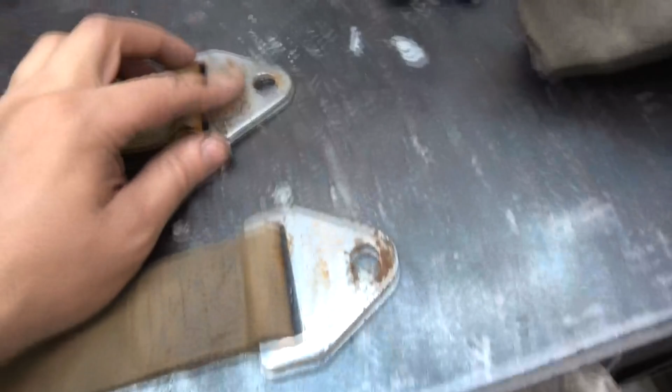So I think what I'm gonna do is just wash them and toss them in there. I might wire wheel some of this rust off, try to leave the paint on there if I can, but I did get a set of seatbelt bolts for the car. They do fit in there.

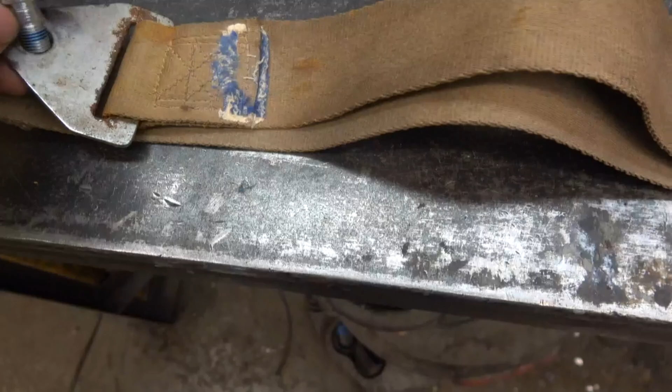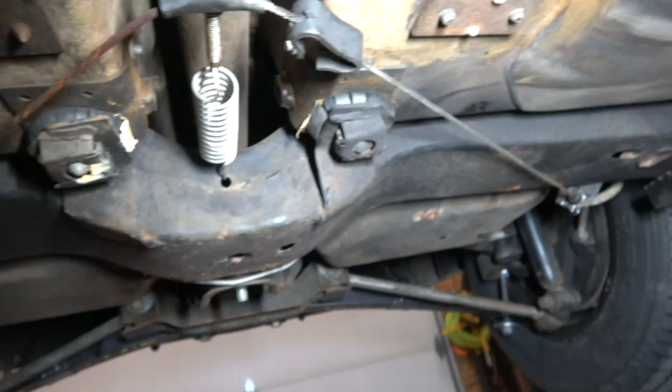I'm not sure what year they started it, maybe in '65, where they had cables going to the seatbelts underneath the car. We'll take a look at that area. So here's the bracket on the car that bolt screws into, and they would have had a cable coming down like this.

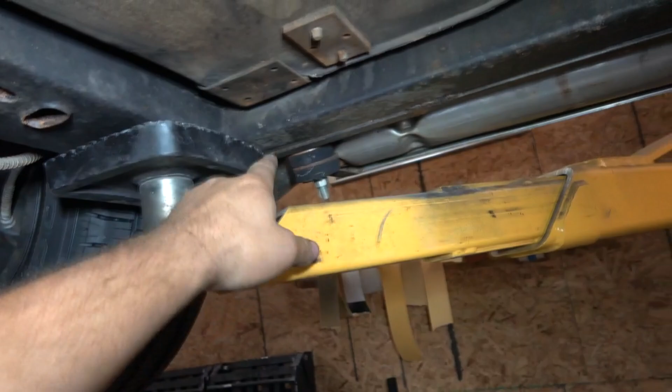There would have been like a thing in here for the cable. The lift's on it here, but this is the other bracket, I believe. And then the cable would come down and screw to the frame. So I don't think this car had those, so I'm just gonna put them on without it for now.

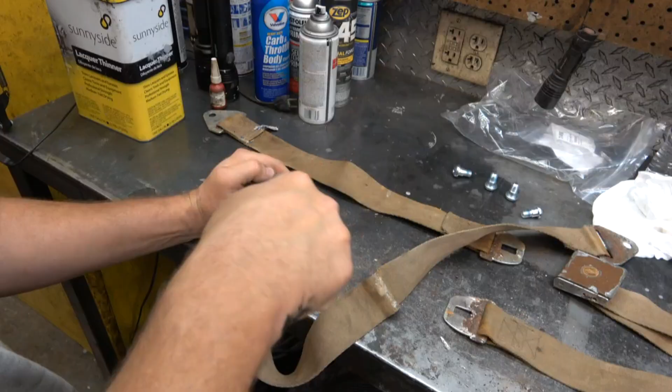Look at these bushings, I better address that pretty soon. I think I am gonna be able to take these completely apart. Just barely. Let's see how good they clean up. Here's belt number 2.

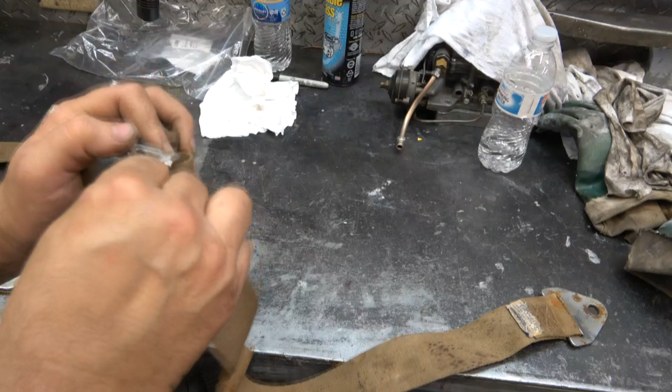I was making this video for myself, so I want to get these back together.

Chevrolet, 1963. These are most likely the originals. I'm sure this material would hold you back in an accident, but I bet it's nowhere near as strong as it once was. So I washed these, scrubbed them down as good as I could.

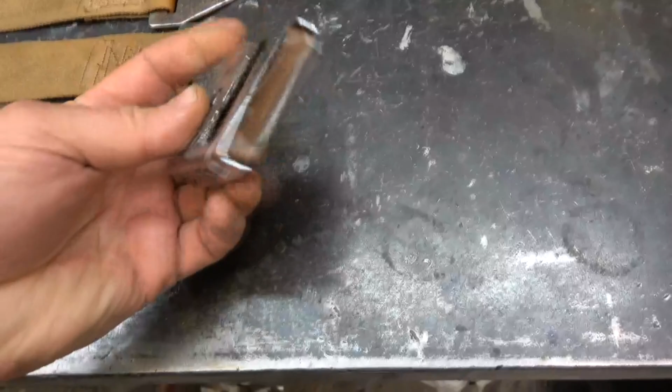Probably the most notable thing is the fabric is actually flexible now. It was kind of stiff before. I scratched as much stuff out of these as I could, wire wheeled them as best I could, lubed them up.

For me, I think this is gonna be good enough. There are really good reproduction belts out there, but I just don't feel like spending the money on it right now. So these actually went back together with ease, and they're working good enough where it'll satisfy the police, and who knows, it may even save your life. That or your head's just gonna pivot and you're gonna knock your teeth out on the steering wheel because there's no shoulder belt.

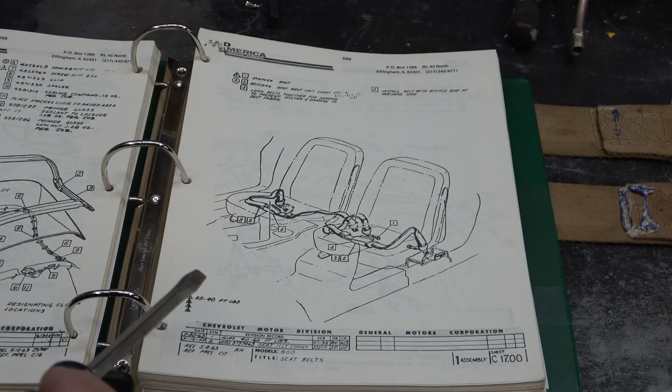Got the assembly manual here. Seat belts, D86. This doesn't say a whole lot. It shows a bolt here. I'm not seeing a cable or nothing like that.

It does say install belt with buckle end at inboard side. So it looks like just the strap goes on the outside, and then you got that buckle mechanism on the inside. Pretty sure the seat just has 2 bolts on the front here, and then the back slips into a receptacle. Here's what the back of that seat slips into.

Wonder if something's in there. See if we can find a date on this. May 17th, 1994. So this car may have been on the road as long as 94.

The foam is deteriorating on these seats. I already had this driver's seat out once. I wouldn't be surprised if I get these seats redone at some point here in the near future.

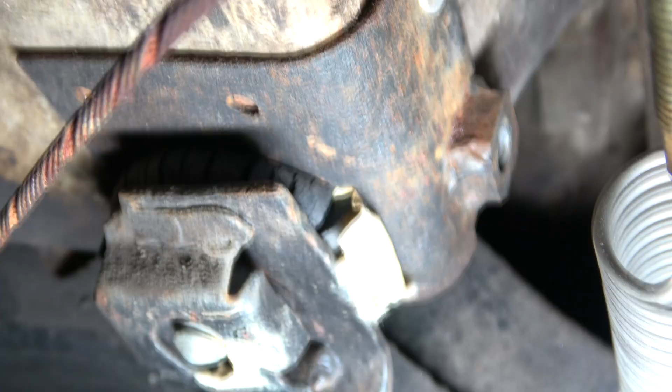For these inside holes, I think I'm just gonna heat up the end of a piece of metal and poke it through that carpet and melt through it. You don't really want to drill through it because you can grab a strand and pull it out of the carpet.

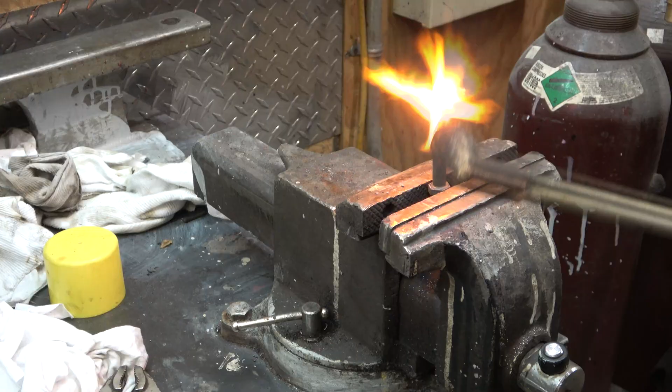I'll probably let this cool off just a smidge before I attempt poking it through. The carpet's disintegrating, but I found the hole. It's right up under there. I think if I trim this carpet up a little tighter, just the one hole might be good enough.

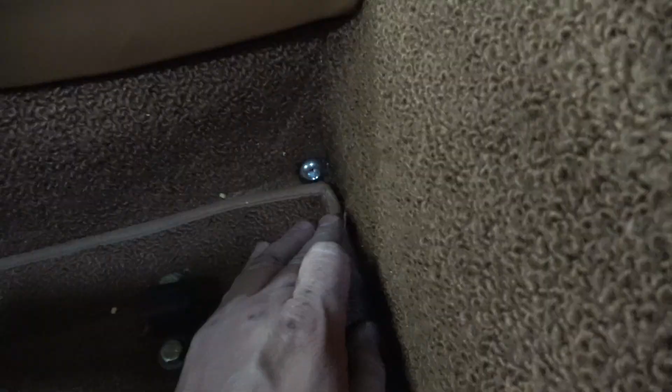Alright, I finally got it started after cauterizing the area. I had to take the body mount bolt out to get in there, and then I had to run a 7/16-20 tap from the underside to the inside. But I got this bolt to start, so I'm going to try to put the belt in now, and then move on to the next one.

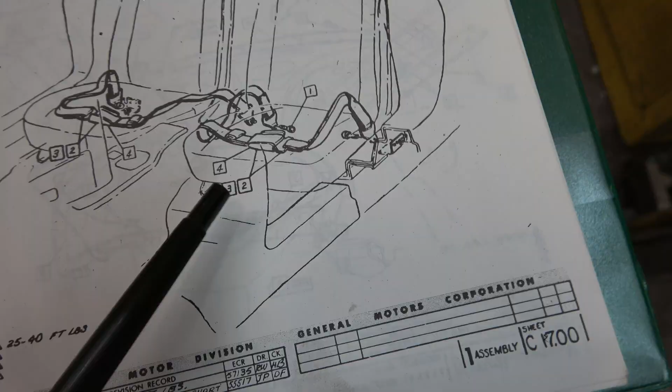I'm looking at the assembly manual, and it kind of looks like the strap goes to the buckle and then goes back up over the top. That's not how these were. If you were to buckle this, it would be folded underneath. I think these may have been assembled incorrectly. It would have to go from here around, and then the tail would come out the back and then be on top. So I'm going to redo these belts.

So to me, this looks more like the assembly manual, and it makes sense because you could pull on this to adjust it. If it's on the underside, you wouldn't be able to do that.

All these bolts had a smidge of Loctite on it. I'm leaving it a smidge loose, hoping that Loctite activates, so that piece of metal can swivel on the shoulder. With that carpet in there, it gets pretty tight.

That one down there underneath that speaker wire, I'm just going to run a tap through it right away. I think it'll come out of this carpeting if I wanted to trim any carpeting. We'll see. There it is. That one is quite a bit easier.

I put it in so the seam is towards the outside, so it doesn't chafe whoever is wearing it. Basically doing the same thing to the other side. One thing I do have in the toolbox is a seamstress scissors. Recommend having one of those to cut this thick carpeting.

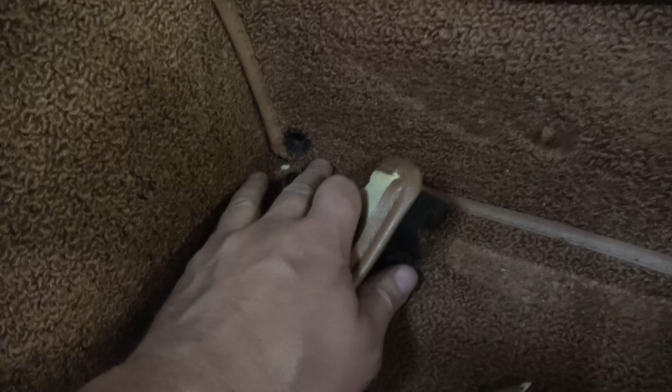Like I exposed this body mount bolt hole. It'll be covered with this top flap, but otherwise it would have been hard to get at once this bolt was landed. Seat belts are in.

Here's the finished product. I just laid them off to the sides of the seats. Should be legal now. On to the next project.